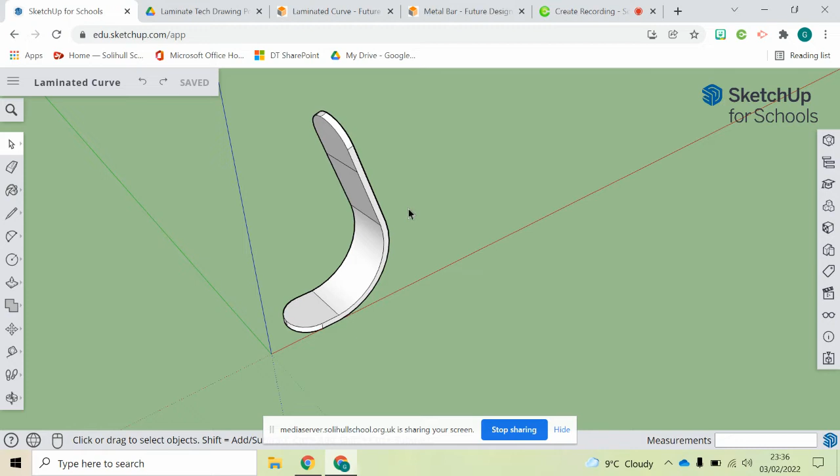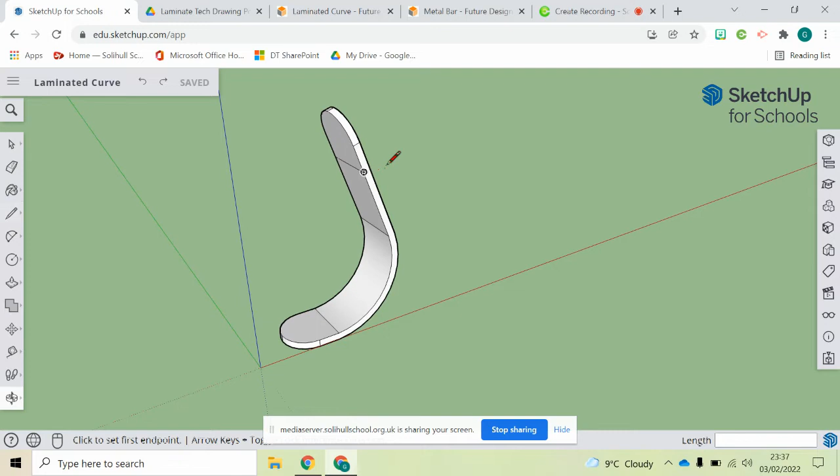So I've got the original drawing from earlier. What I'm going to do is look at it from the side. This is the line where the radius of 25 comes down. What we need to do, and I've already drawn this, you'll see I've gone down 25 millimeters. I've drawn a line across here, so that is 50 millimeters from top to bottom. Now what I next need to do is pull that down using the push-pull tool.

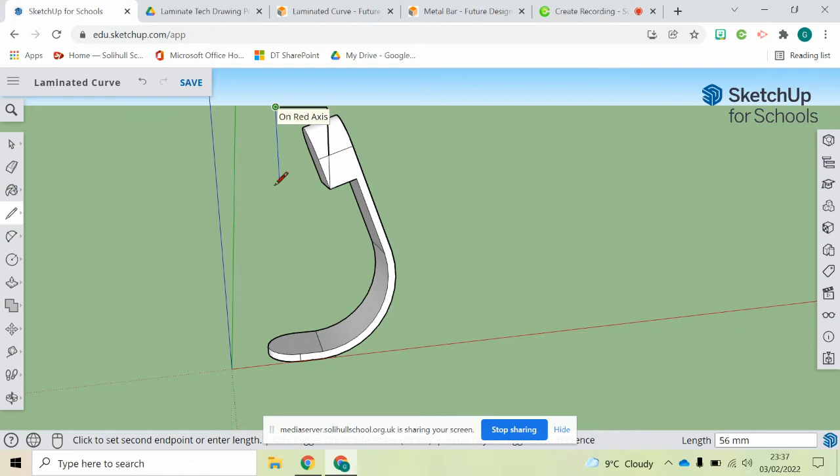Looking at it side on, if I were to draw a line now vertically up here, that would definitely be taller than my object. So I'm going to go across, go down, go across.

So what we're doing at the moment is drawing a series of construction lines. I'm holding Shift on the keyboard, you'll see the plus and minus appear, and I'm selecting all of these lines. I'm going to copy paste it and place it just to the side over here. I'm then going to rub out all of those lines. I don't actually want them, we're just using the drawing as a guide.

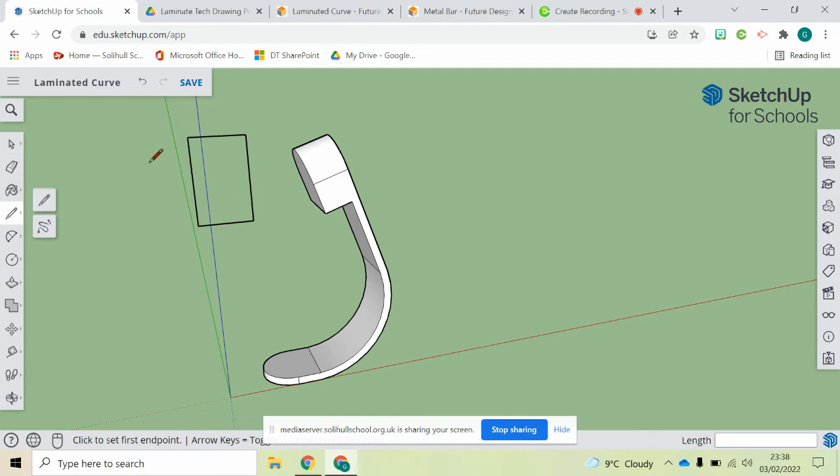I'll then make this a block. So you've seen I've drawn corner to corner. And what I'll then do is make it fractionally wider than the object itself. So what I now have is the laminate with a piece of meranti or sapele added on.

It's yet to be angled like you see on here. We want that flat surface looking there. I'm going to use this block to achieve that. So it's impossible on SketchUp to now extrude because there's a curved surface here.

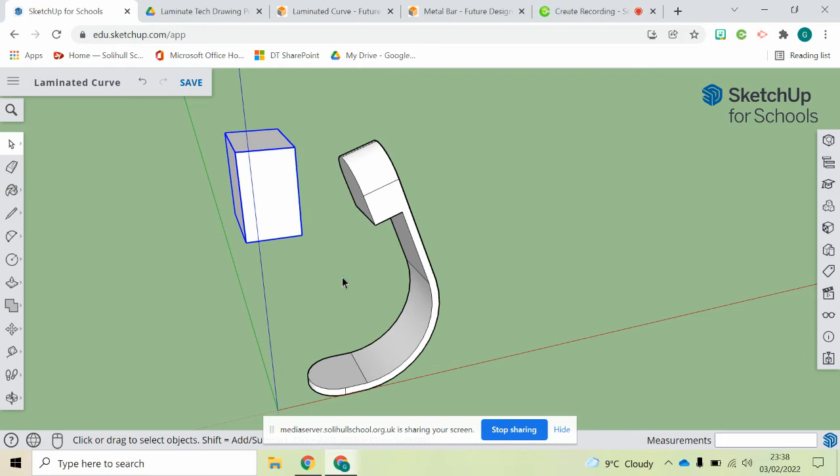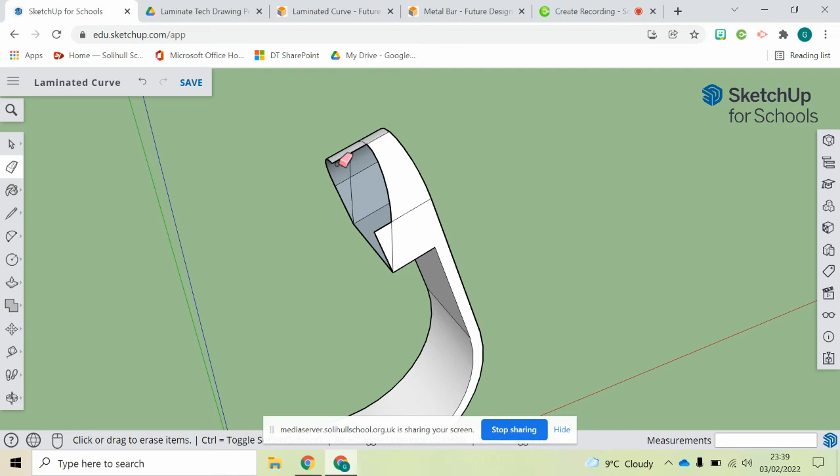So I'm going to highlight this object, right click, and make it a group. I'm going to click M on my keyboard and move it across to this point here. Now what should happen at this point is if I click on that object, right click, and intersect with model, what should happen now using the rubber tool is I should be able to rub out the lines. But what it's done - and I'll undo this so you can see it again -

it's now created that flat surface. The only thing left to do is to add on the center line down here, and it fills it in, and we've got that lovely flat face that we're after over here.

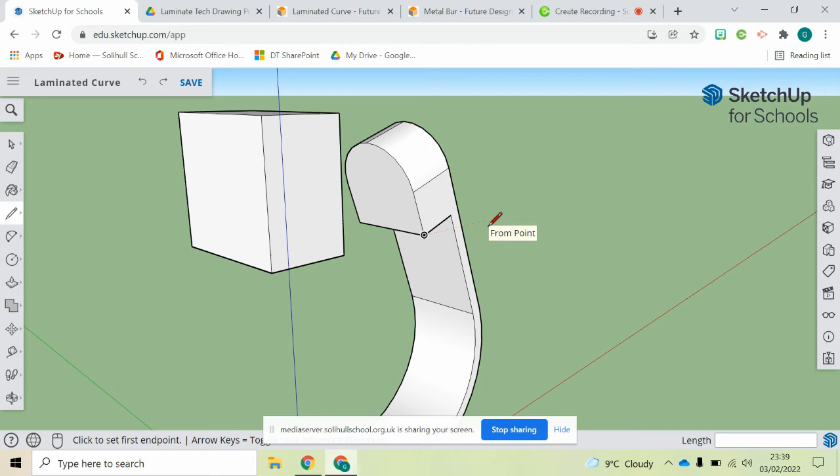So to recap that, I'll undo that stage to here. So what I did is I had this block, which I made as a group. I moved it onto my drawing, which is at this point here. And we're going to use this edge to intersect with my model. So that group is going to intersect with my model.

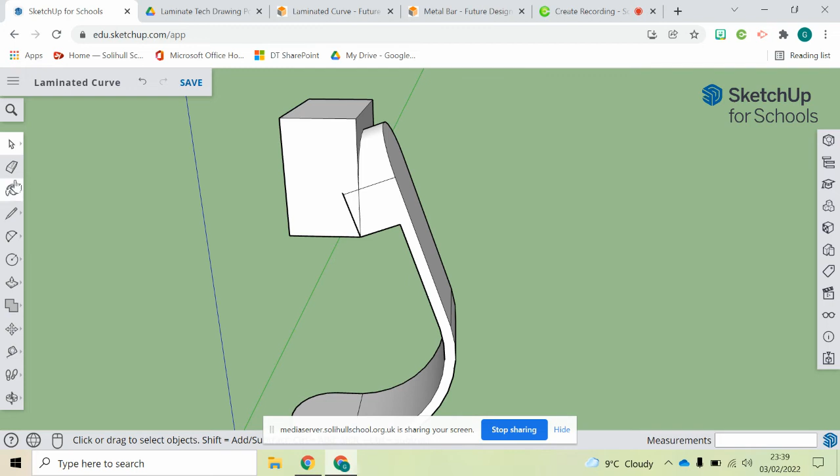So I right click, I intersect faces with my model, and then I rub out everything I no longer need. So the block is gone, so it's now left - I suppose the best one is there. There's no line on that surface. When I do those few stages, what I have is that line that's now drawn on that curved surface.

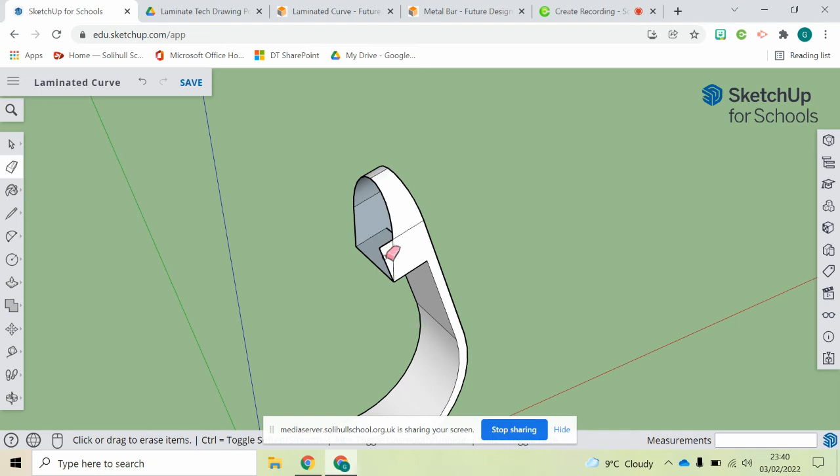And that is the only way, as far as I'm aware, that you can draw curved surfaces onto another curved surface. So the line tool to finish it off. The nice thing about this one is because it's a nice straight line from the center of my radius to the bottom, we should find that there's a center line we can use.

Radius of 3, enter. Get the eraser tool. Oops, he says.

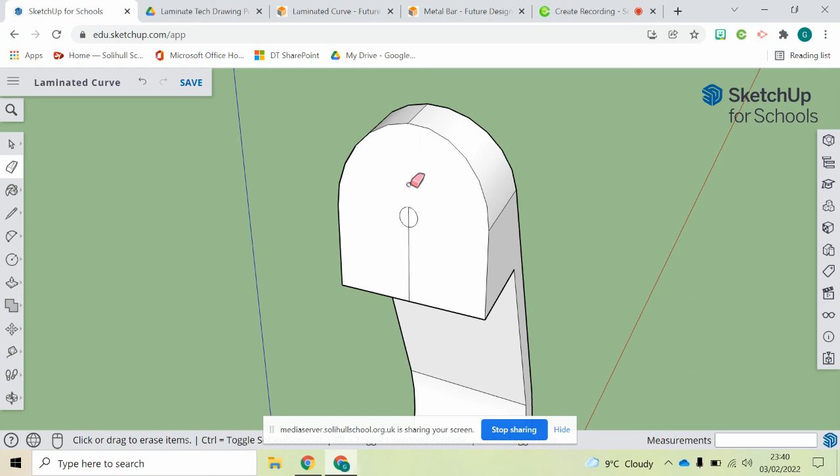And you've got that reference point for later on. For now, I'm going to leave it there. And that's now your next component made. What I do need to do is call that laminated curve plus wedge.